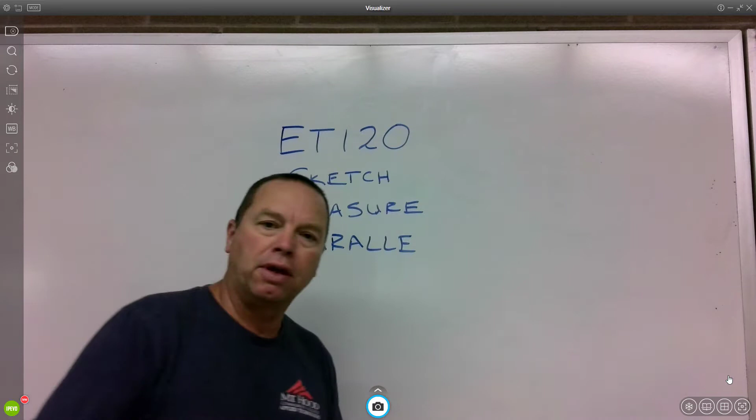This is going to be a video for Wednesday, would be September 30th, maybe? Today's 28th, 29, 30, yeah, September 30th. So we're going to continue on. You did a lettering exercise last time, and this time you're going to do some sketching.

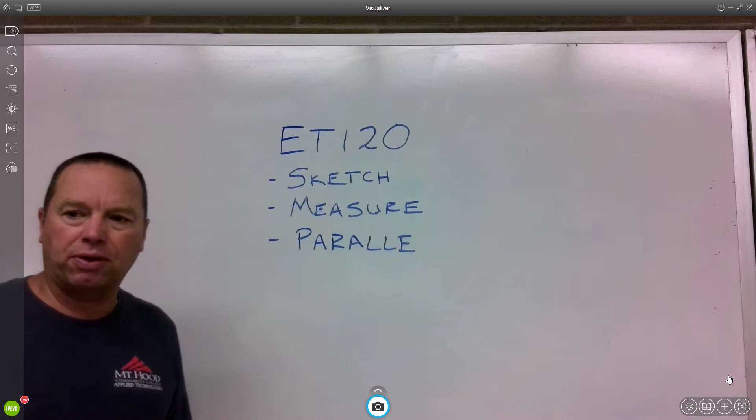So I want to talk about actual sketching and technique. I want to talk about the book a little because I guess we have a little problem with the book and the bookstore. But that's all right. We can work our way through it. I want to talk about measuring and architect versus engineering scale a little bit because you have to do some measuring on this exercise. And then we're going to focus on parallelism, so keeping things parallel.

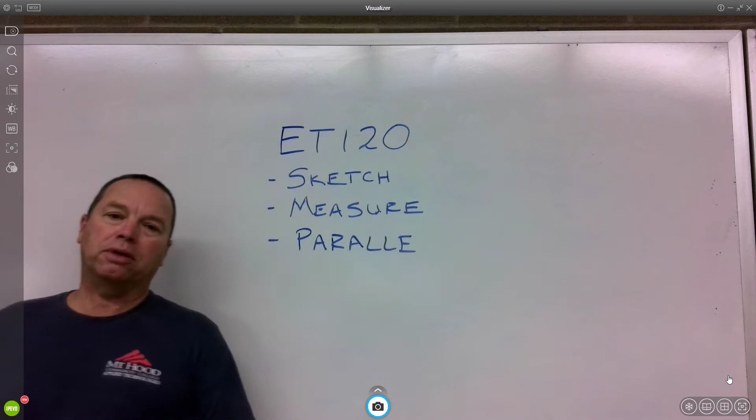All right. So sketching is super important. They actually talk about it in the first few pages of the book, and then they move away from it and really get into the instruments and the triangles and how to make angles and how to draw straight lines. And then it's not until chapter 5 that they come back to sketching. But of course, that's not the flow I want. I want us to sketch first, and then we'll move to instruments. So I'm going to jump around the book a little bit. The assignments will jump around the book.

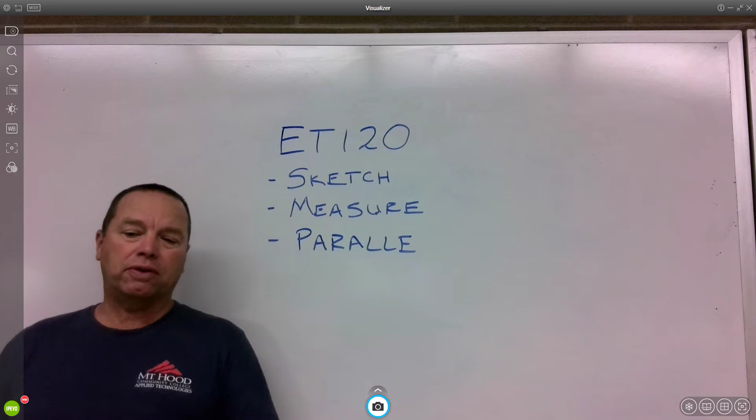I have edition 7. If you have edition 8, I think the content will be pretty much exactly the same, and maybe even the assignments will be the same number. They're definitely in your book, so I'm going to show you where they're at in edition 7, and I bet in edition 8 you can find them no problem. So, all right, I'm going to swing the camera around, and we'll look at the book a little, and then we'll talk about sketching and your first pencil and paper exercise. Okay, so here we go. Let me get it adjusted up good, or at least better.

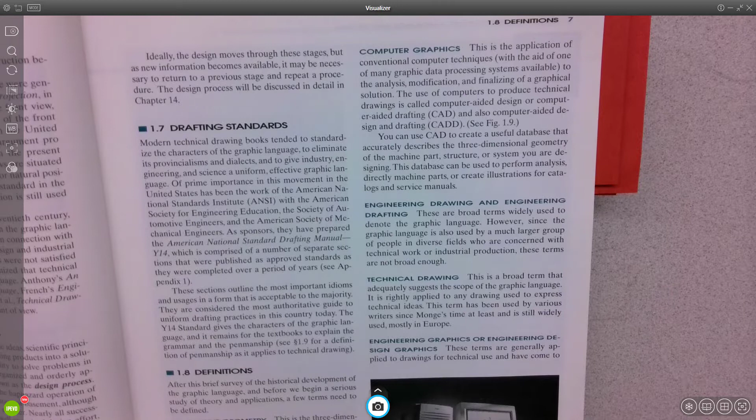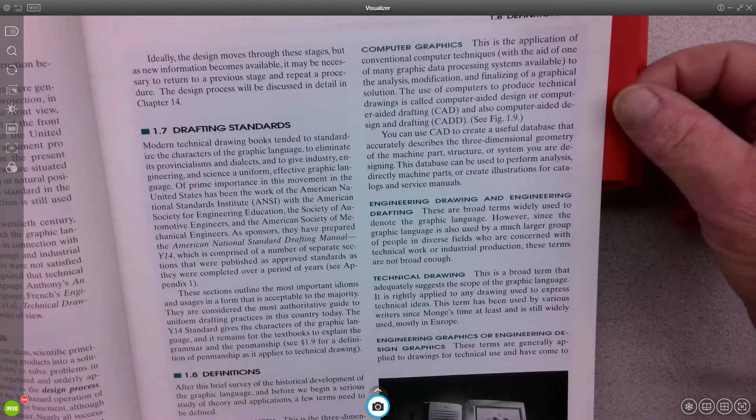All right, so early on page 7, it starts to talk about drafting standards, and drafting standards are why this class exists. You can make a drawing, but the important thing about the drawing that you're going to make is somebody else in this class or somebody else across town or me, I need to understand what you're making. So we need to have some kind of standard. And the book talks about these standards early in chapter 1. So you might look through there. There's a little bit of historical information about that. And then it kind of talks about drafting in general and the flow of drafting and the different styles.

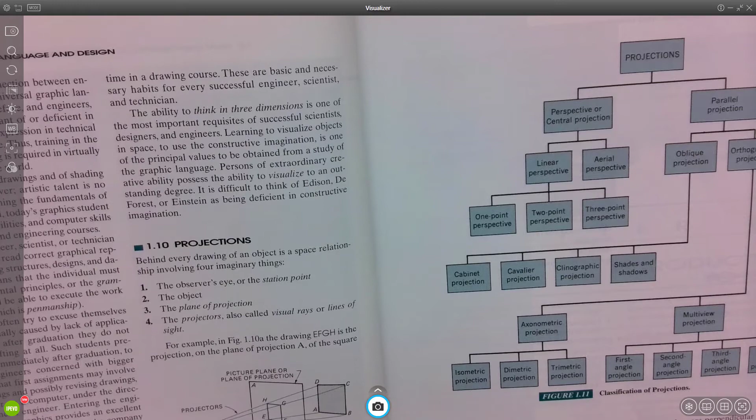So most of this over here has to do with more of a pictorial type of drafting or more of a three-dimensional type of drafting, okay? Down here is where we're actually going to focus, which is called multi-view projection. Now, a projection is just a view of an object. It's where we look at an object and we project it onto a piece of paper.

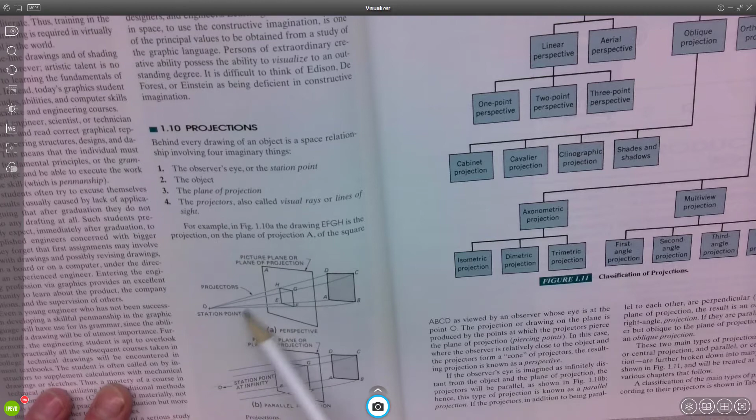What we're going to do in our projections is we're going to do straight line, very perfect parallel projections, right? These are perspectives where this is the true size and it gets smaller and it looks good. We're going to go true size to true size. We may scale it up and down, but our goal is to get true size and true shape on the paper, okay?

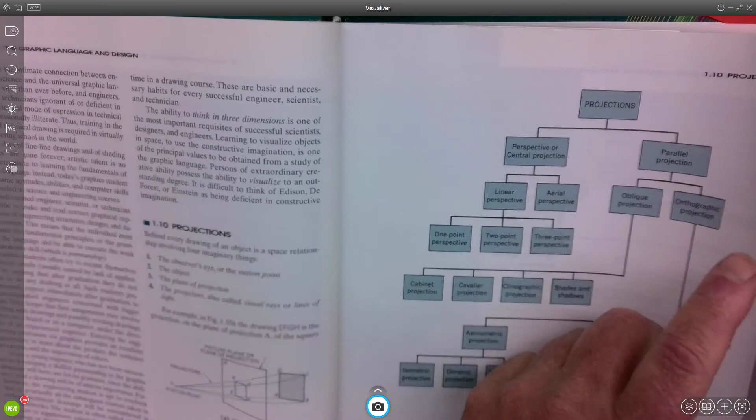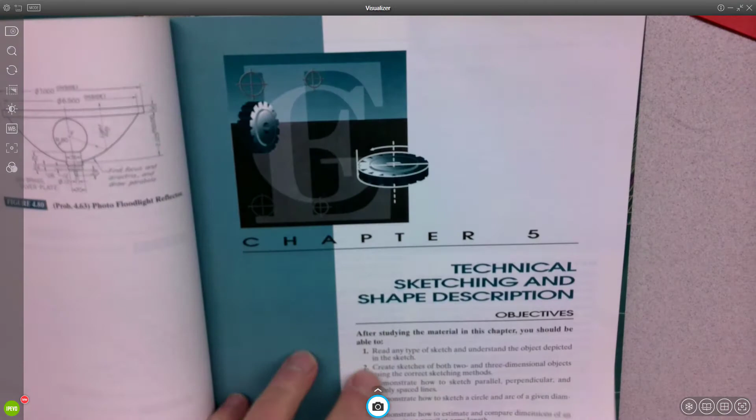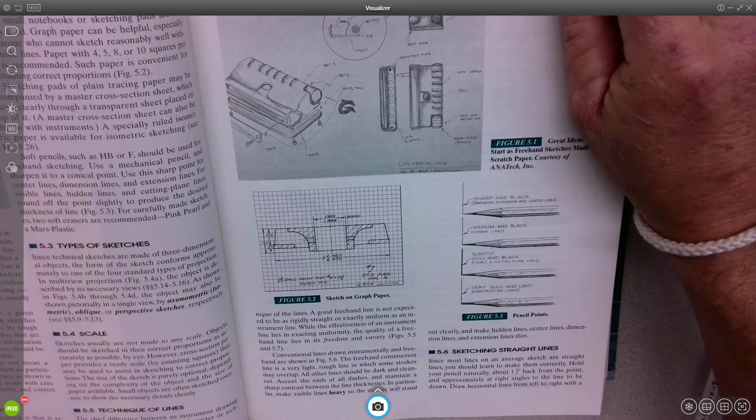All right, like I said, we're going to jump around a little bit. I'm going to start with technical sketching, which is chapter 5. So as I go through stuff today, if you want to reinforce that, you can do that by reviewing chapter 5 information. And there is a bunch of information in here that I am not going to cover. But at some point, I'll probably come back to it. Like, we will talk about scale quite a bit, and we'll actually talk about pencils and how to find different leads and different hardnesses. But the sketching we're going to focus on is this kind of technical sketching, okay?

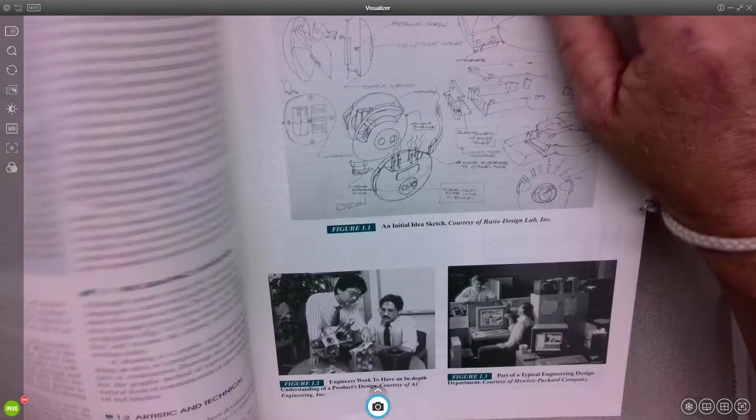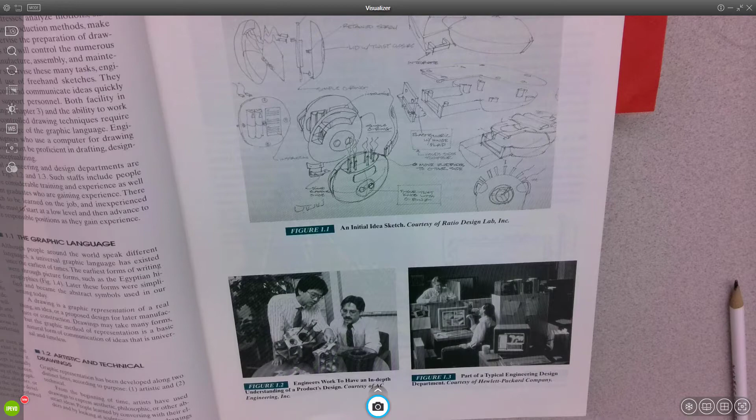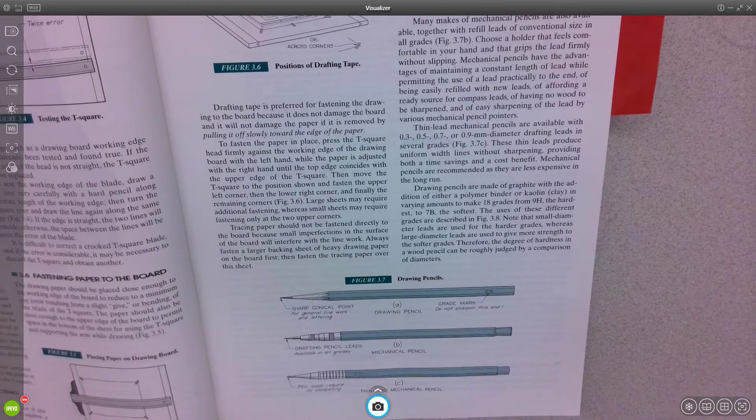It's done a lot. Right in the very beginning of the book, they start to talk about idea sketching, right? And it's like, oh, they should start there. That's exactly where most projects start, is in the sketch phase. But then they don't, right? They head right off into CAD, like, oh, that's not even where we need to go. And then they head off into instrument drawing, which I don't want to do first, okay? We're going to sketch. So chapter 5.

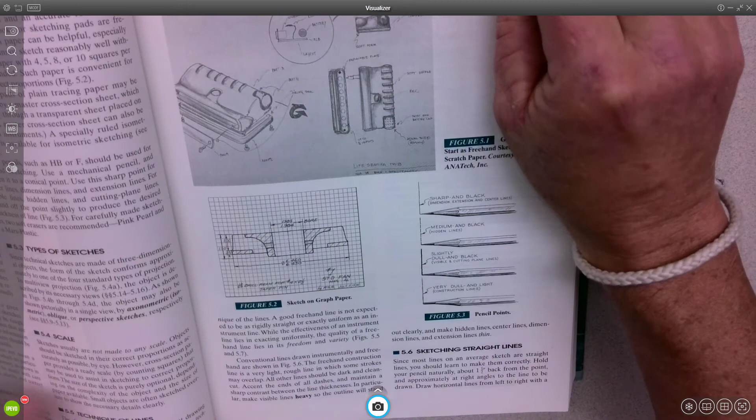All right, so let's just talk about the basics of sketching, because I'm no artist. I don't expect you to be an artist. But if you do follow some basic guidelines in sketching, you can make some decent sketches, okay?

One of the most important features for the sketches that we're going to make is parallelism, which means these lines appear to be parallel. That's why this looks so good. These lines down here are parallel, top and bottom, and then they're 90 degrees to each other if they're supposed to be 90 degrees, right?

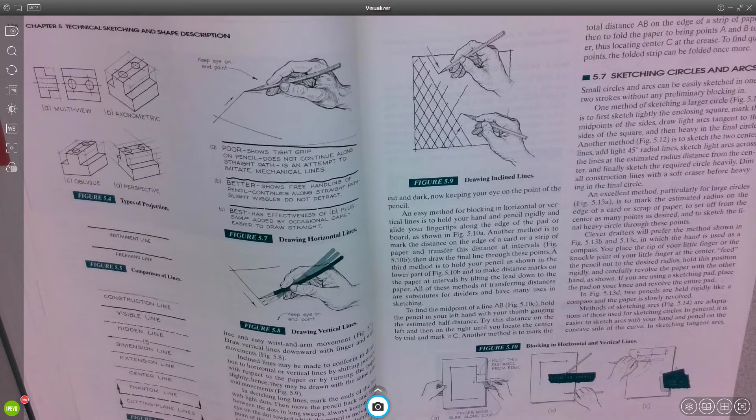So when we get into more advanced sketches, like three-dimensional sketching, this looks good because all of these lines are parallel, right? So we're going to really focus on this concept of parallelism in the beginning. Our first exercise is basically doing lines like this. We're going to do different setups, and it's a little complicated, so I'm going to go through it a little bit with you. But I want to talk about basic sketching first.

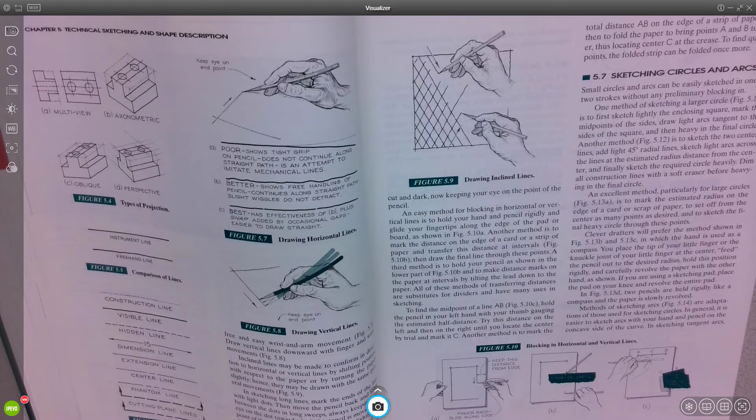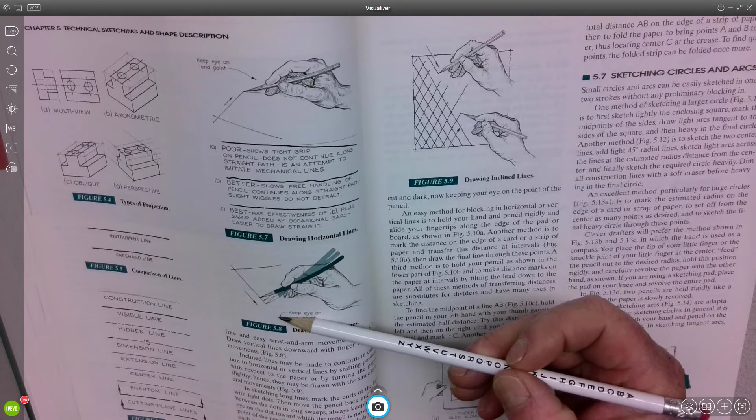How to get straight lines. You can see this motion here, and keep an eye on the end point. That's really important, which means you have to have a start point and an end point. And he's making small strokes. Small strokes will give you lines that look like this, and that's okay in a sketch.

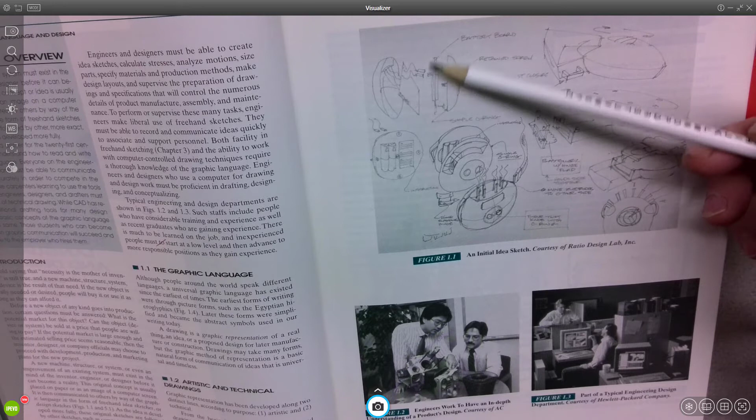Again, back to this first concept sketch, right? There's no perfect straight lines there. And where they did actually just draw a line without making small strokes, it looks kind of goofy. Okay, so if you can kind of just work through the line in smaller strokes, it makes a lot of difference.

I'm going to try to demonstrate this for you. So I'm going to use my engineering green paper. I'm actually going to tear it off the pad and just set it down and then sketch some lines. Use this green paper, I highly recommend it. First of all, I can see the lines coming through.

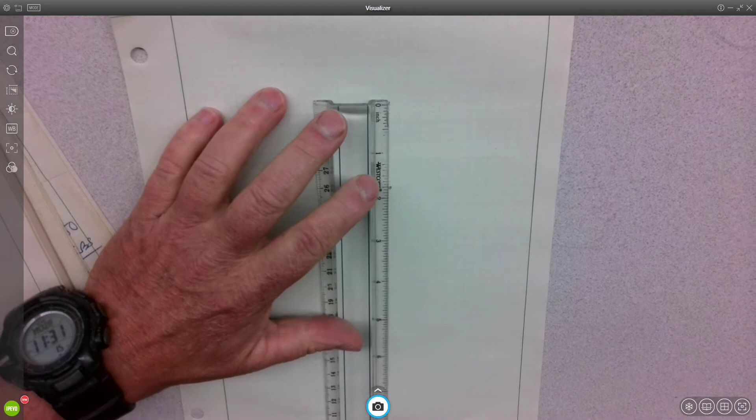So if I need a line this long, and I know its length, it's okay to take your scale, right, and lay it down and give yourself two marks. I'll go here, 2 inches, right? I'll get rid of this one. Good eraser is super important. All right, so it's okay to lay the scale down and boom, boom, put some marks down. That's fine. This is a 2-inch line.

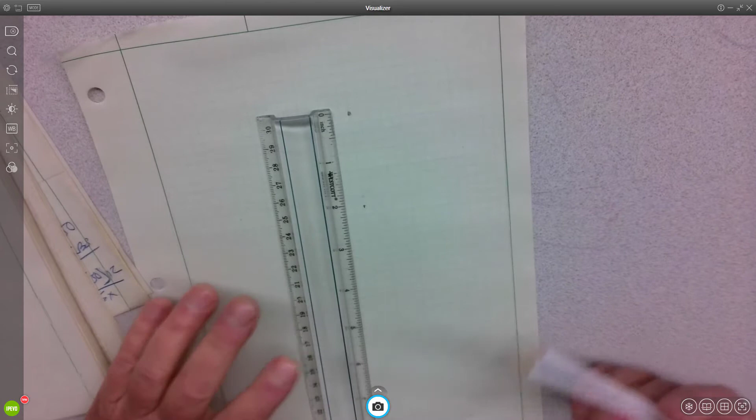But when you go to draw it, get rid of the straight edge, and then let's put a sketch in. And what I do is I kind of give myself a start and an end spot, and then I work it. Small strokes from one spot to the other.

All right, 1 minute. Okay, sorry about that. I had to do full surgery on my pencil.

All right, so since I did surgery on the pencil, this is the pencil I like. This is a 0.5. I actually prefer a 0.7. And the reason I like it is because it has the spin eraser. It gives you lots of erasing potential for drawing.

All right, so we talked about sketches. So, vertical, horizontal, not so bad. And don't hesitate to do whatever you need to do, right, to make yourself a good line. You can rotate your paper, that works fine. And parallelism is what we're looking for, right? And then we are looking for some line quality. We want these lines to be the same, thickness-wise, okay?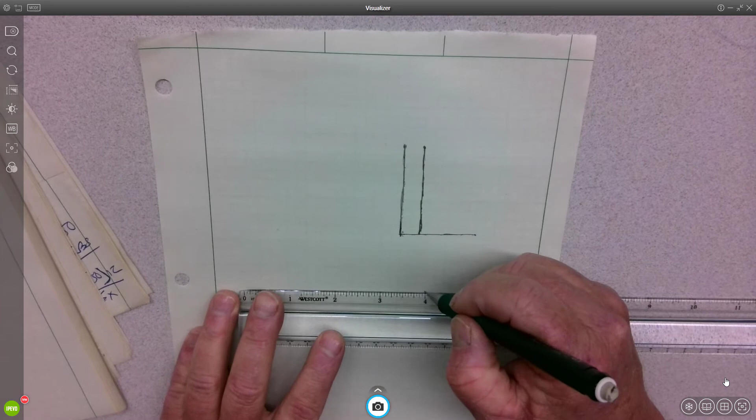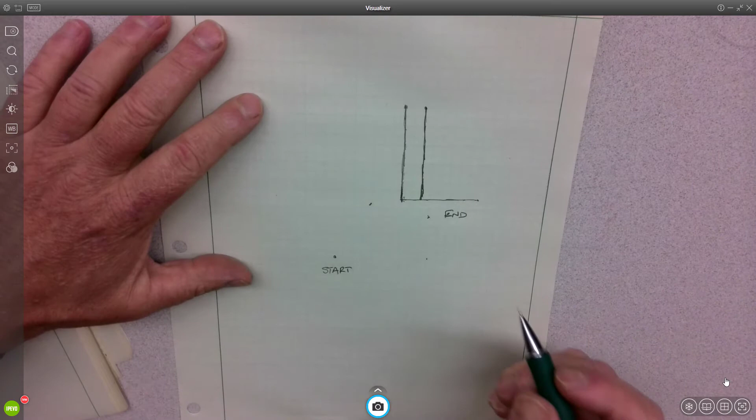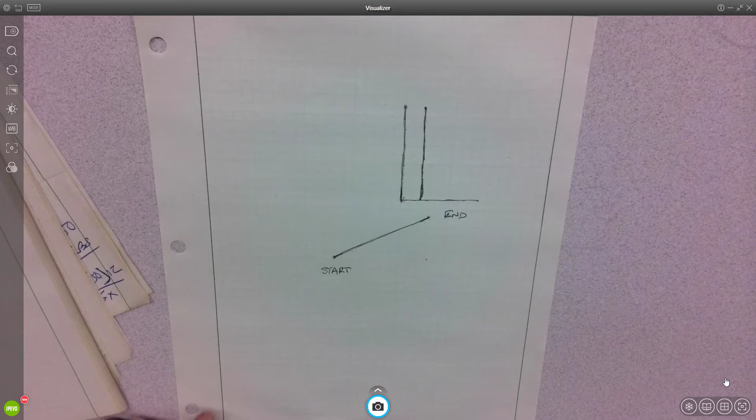This is where they're talking about keep your eye on where you're going. So I'm going to go from here to here. And what I do is I put starting lines at each end, right? But then when I'm going from here to here, I'm looking at this point as I'm trying to get there. That will make a very straight line for sketching. Start point, end point, look at the point you're heading towards.

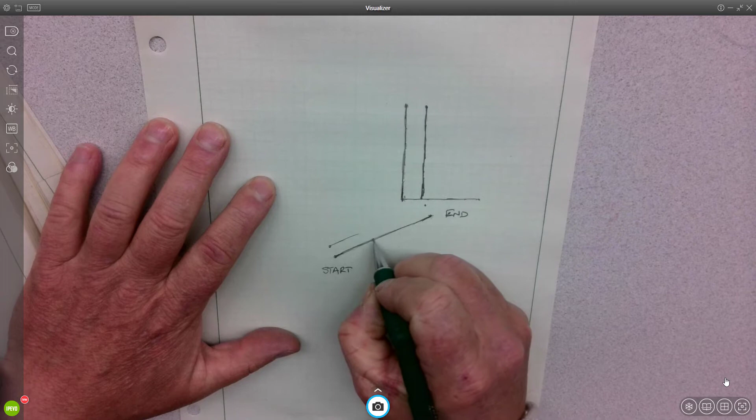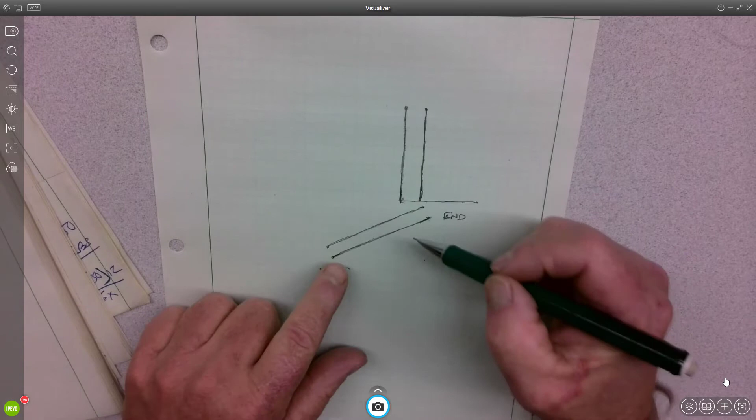Basic technique. Then if I was to put another line here and here that's parallel, when I sketch, I focus on this line and my separation between those. So I can get parallel lines, but I have to think about, as I'm drawing this line, I have to look at this and stay the same distance away. It is a little bit tricky.

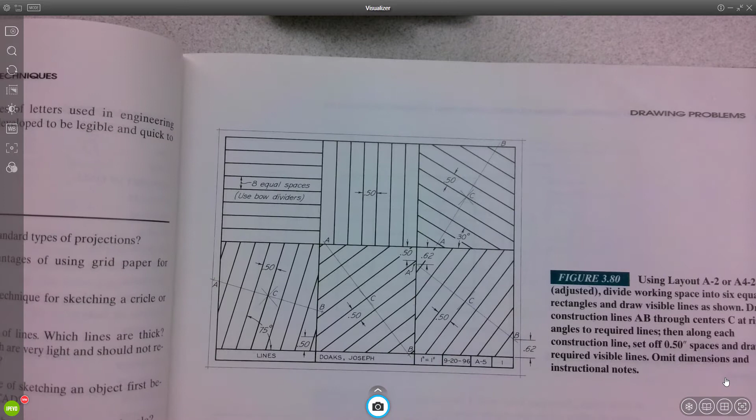All right, the exercise that you're going to do in edition 7 is on page 87. So it's this exercise here. And you're going to sketch it. And you know and I know that that's not a sketch, right? These are CAD lines, printer lines, computer lines for sure. But you're going to sketch it, okay? And in the exercise that I put up on Blackboard, let's just see if we can find that real quick.

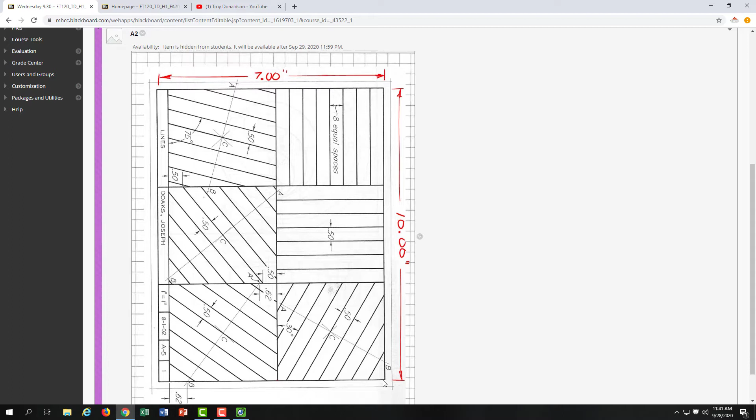Okay? Now they talk about using A-2 or A4-2 adjusted and then divided into 6 equal working spaces. So that's what you're going to do. The A-2 and the A4-2, that's referring to the front cover, and it's referring to title blocks. So really, that's referring to this title block here, which I do want you to include. I want you to put the word lines here, and I want you to put your name in there.

And notice how straight and clean these are. That's because they used guidelines. So give yourself guidelines for the text. This is a scale, 1 to 1. This is the date, kind of close. We're more like 9/28 and not really 96. This would be the file location. We can leave that blank. And this would be the page numbers.

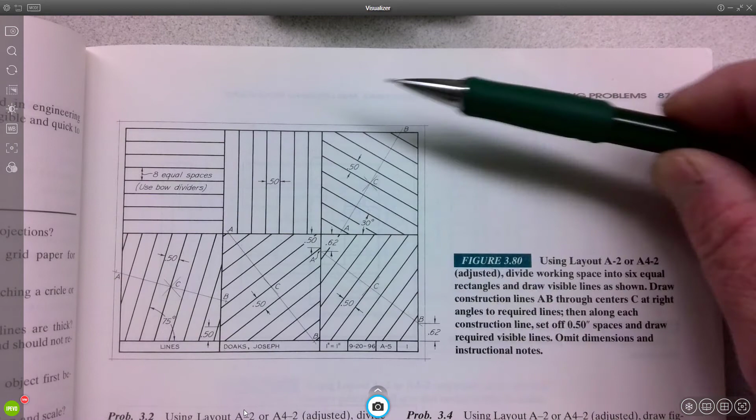We have 1 page. All right, so let's talk about these 6 areas because it can be a little tricky to lay them out. You're just going to sketch the lines, not the text. So no text, no dimensions, just the lines. Okay? First one's pretty easy. It says use bow dividers. You don't have bow dividers, but we just want 8 equal spaces.

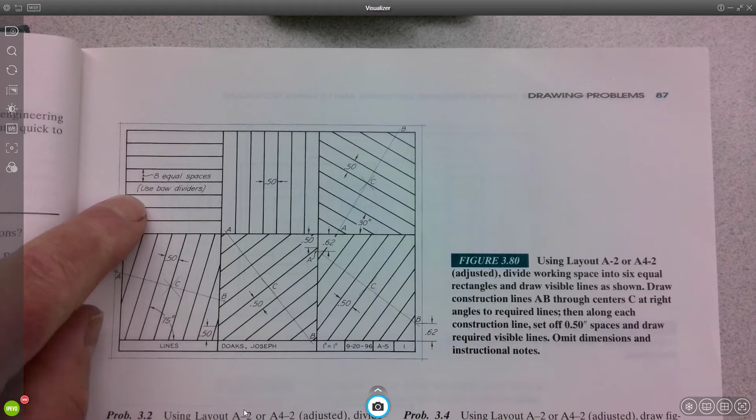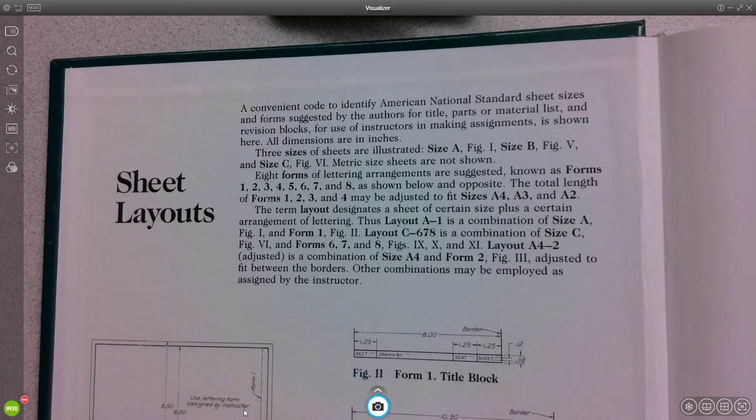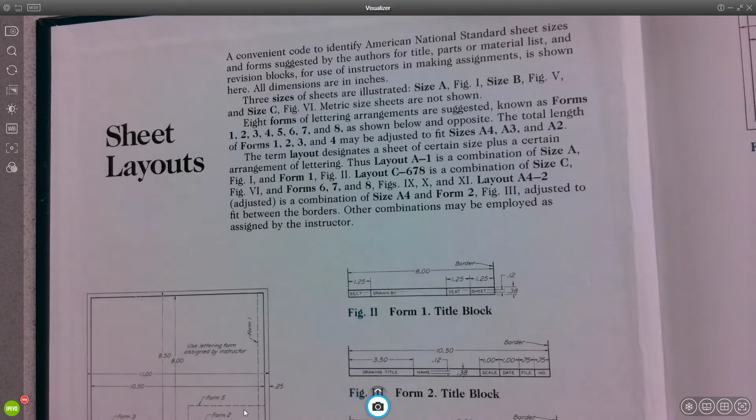So after you take your 10 by 7 and put down a space for the title block, and you can find that spacing back here in the Form 1 title block, maybe the Form 2 title block, this one. Looks like maybe it's 0.38 or 3/8 of an inch. Sorry, 0.38. Right? And this looks like all the information. So it looks like a Form 2. A-size paper, that's 8.5 by 11, and Form 2 title block. So that's the A2. Anyway, you can get that spacing.

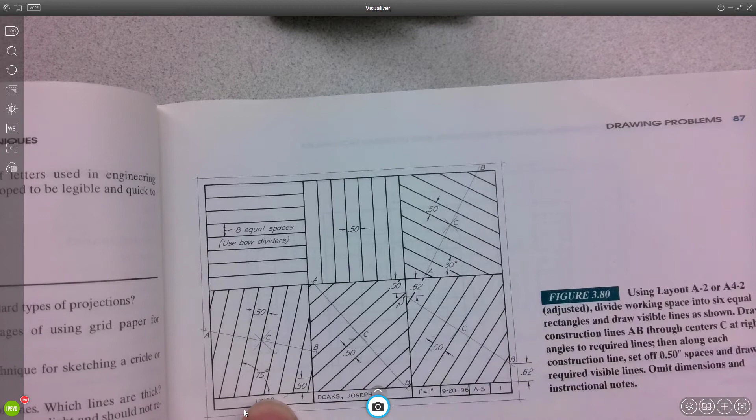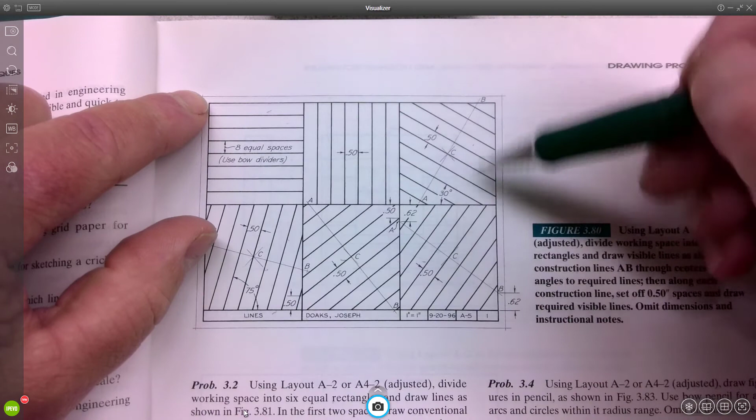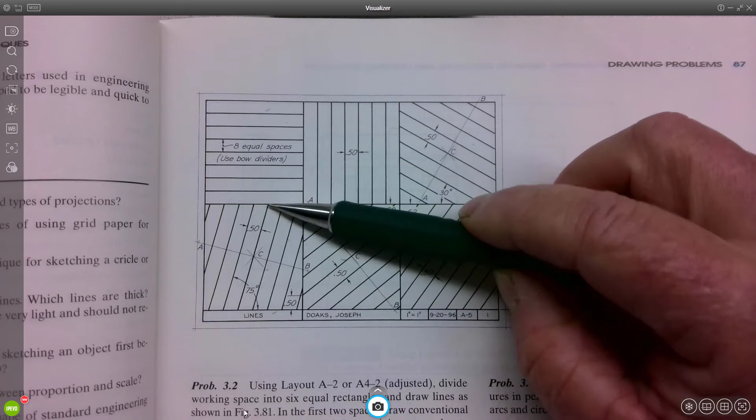Once you do that, then you break it into 6 equal spaces. So take this distance, which is no longer 7, right? It's 7 minus 3/8 of an inch. And divide by 2, and you got it. Right? And then take this distance, which is 10, and divide by 3, and you have these box sizes. All right. Once you do that, 8 equal spaces. So take this distance, measure it, use your calculator, divide by 8, and then lay them out, and sketch by hand all those lines. Yeah, for real.

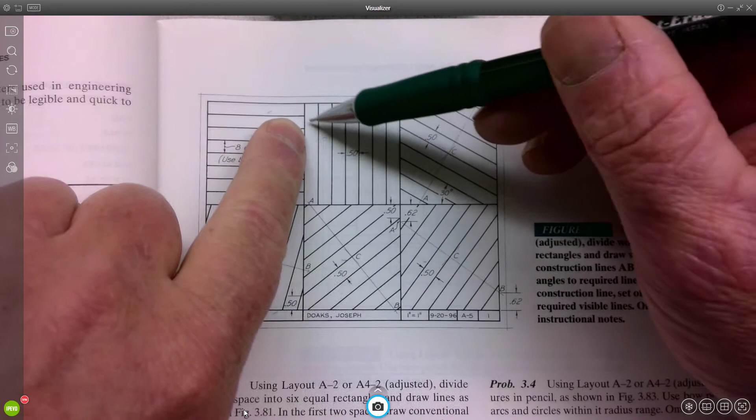All right, this one looks like they just want them 1/2 inch apart. So what I would do is I would start in the middle with a 1/2 inch, because you're probably not going to end up with a whole 1/2 inch on these outsides. So start in the middle with a 1/2, and then go 1/2, 1/2, 1/2, 1/2, and then whatever you end up with out here. So do those 1/2 inch spaces as long as you can, okay?

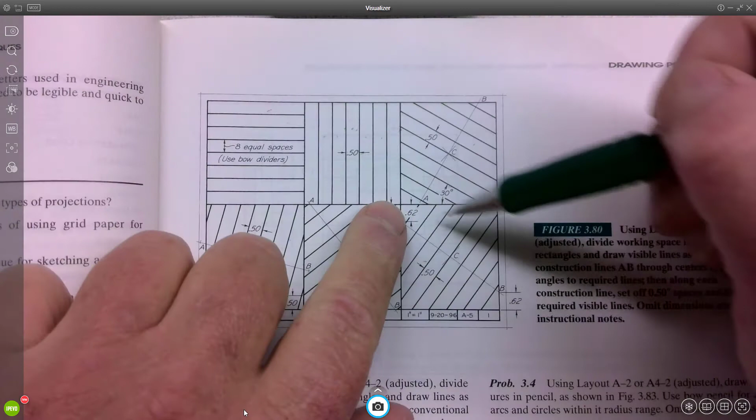All right, then this one, it looks like we're going to go 30 degrees. So if you have your 30-60 triangle, right, you can lay your triangle down and put a mark here and here. They want you to start at the center, the geometric center of this box. And you can get that by crossing the corners. That gives you this little cross here. Boom, geometric center.

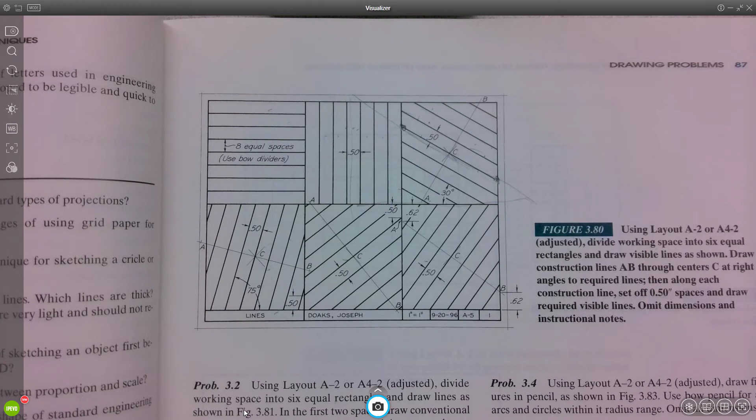Then the first line, I would use your triangle to give yourself a spot here and here, right? And that triangle is going to sit in here, kind of on this straight line, right? And then sketch this first one, and then measure a 1/2 and a 1/2 and sketch it. 1/2, 1/2, sketch it, and just continue. All right, so that's the whole top. The bottom's even a little trickier, okay?

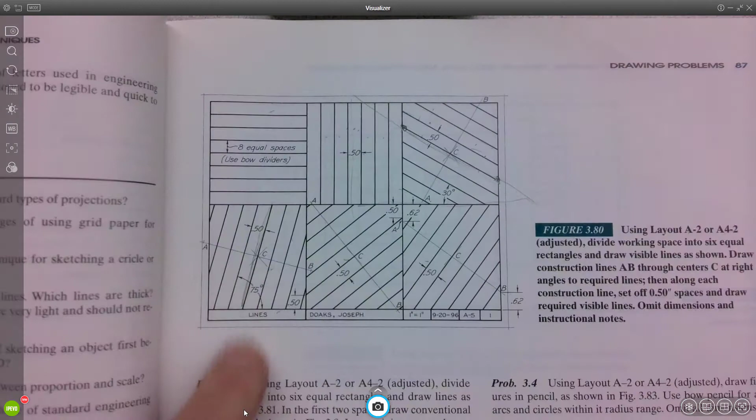So the bottom here, again, starting at the geometric center, this time they want you to go at 75 degrees. So first line here, and again, how do we get to 75? Well, they actually show you in this instrument area. Let's see if I can find it. How to put triangles together. I should have tabbed that page. I think I'm getting there. How to put triangles together to get any angle.

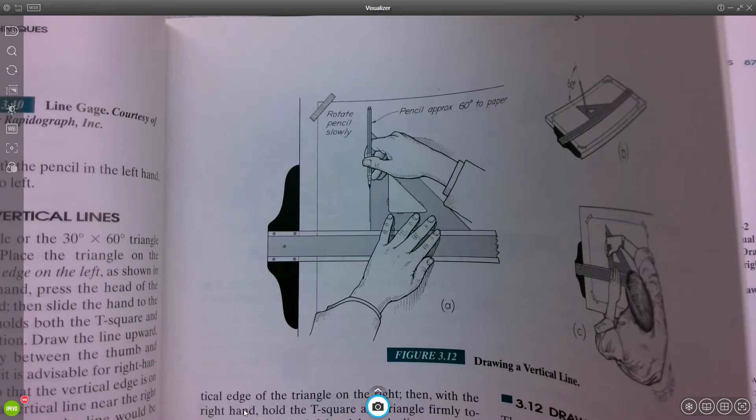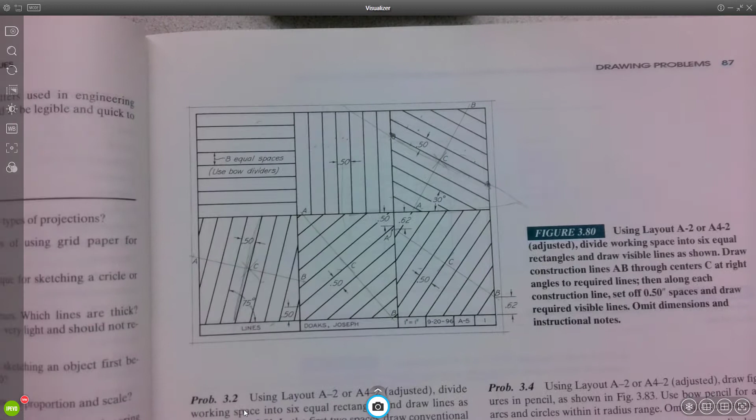But again, from the center, 75, and then 1/2, 1/2, 1/2. And measure that, right? Like, use your scale and go, oh, that's a 1/2 inch. That's a 1/2 inch, and then boom, draw parallel, sketch parallel. Okay?

All right, now, this one's a little more complicated. You're going to measure down a 1/2 inch. You're going to measure up a 1/2 inch to create this first line, right, through the geometric center. So find the geometric center by crossing corners of the big square, and then measure up a 1/2, measure down a 1/2, and then you have your first line, and then we're 1/2 inch, 1/2, 1/2. Again, sketch, sketch, sketch.

This is going to take a while. This is going to take an hour plus, maybe 2 hours, to lay this out precisely with your scales, do some type measuring, right? And then do some sketching. Sketch nice and light in the beginning and then darken it later. Make sure you have it laid out correctly before you darken it up. It's very hard to erase darkened lines.

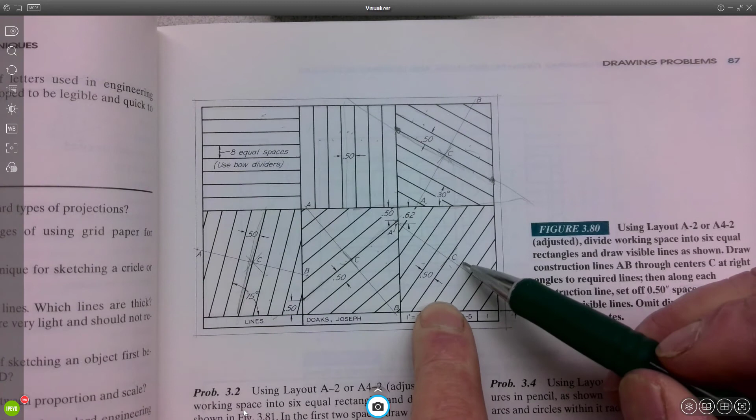All right, the last square, let's talk about that. Looks like we're going to start at the center. Looks like we're measuring up 0.62, so that's an engineer scale, 0.62, and down 0.62 to this perpendicular line. So this line you sketch in, and then we're going to go perpendicular to it, 1/2 inch of spacing. All right, so that one's even a little more tricky.

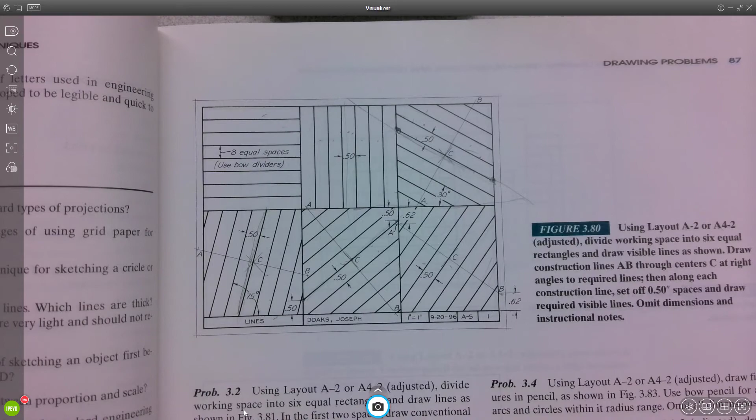All right, if you need help with any of this, because that's complicated, right? That's getting a little tricky. I can shoot more videos on this first lab if you need me to. Like maybe how to lay out box number 6, right? That last one, I can sketch. Let's make sure I'm on screen. I am. So let's say here's the box that you're going to start with. This would be the lower right box, this complicated one.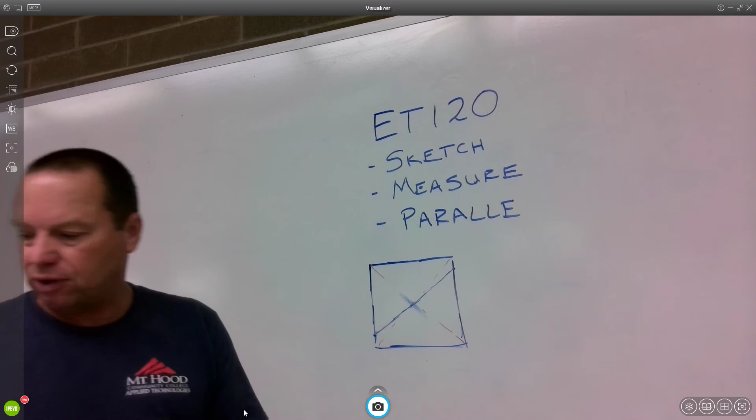Yeah. So then I would have to take a triangle, and now I'm going to go perpendicular to that. It would be great if I had another color, like black. I don't see a black. All right. Oh, maybe a green. If this works, I'll use a green.

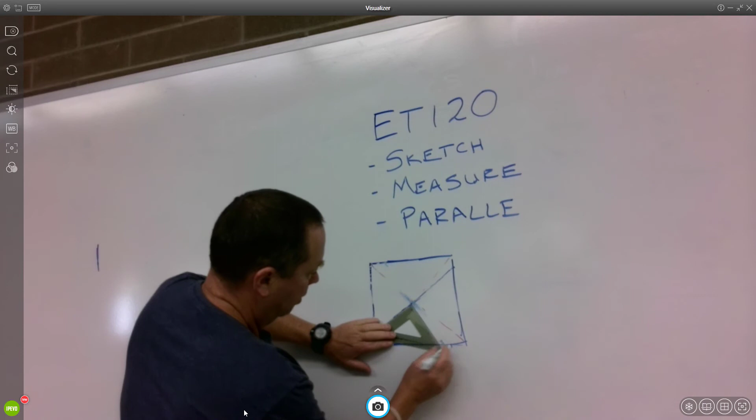All right. So now I'm going to start drawing, right? It looks like I maybe did this mirror image, but I think you get the point. So now I would use my triangle to set up perpendicular to that. Now, my rectangle might not be the same proportion as yours, so yours could end up slightly different. I get that. But give myself a starting point, the center, and maybe the other side here. And then that's going to be the lines that you set up. That's really hard to get off there.

All right, this is going to be trickier. So there's the first line, right? Then I would measure half and half. You know, you can give yourself a few of those if you want. Half. And then I'm going to work with parallelism. And I'm just going to continue. I would measure this, half, half, right? But right now, I'm just going to focus on sketching some parallel lines.

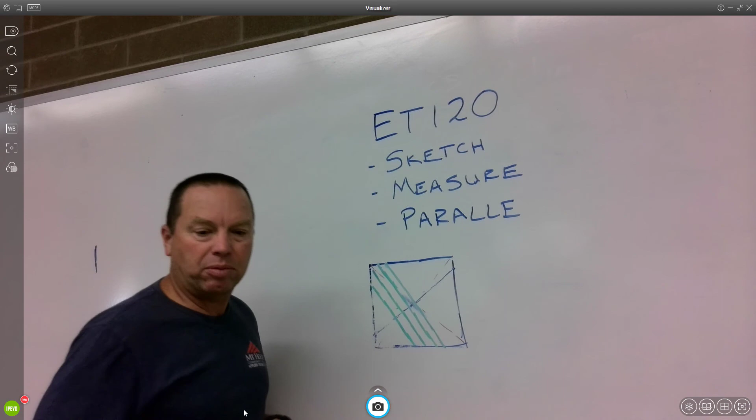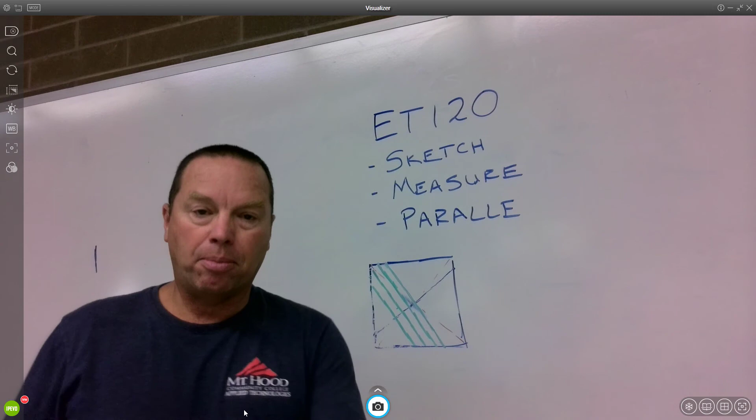All right, looking at the book, it looks like I flipped this. Like this construction line is down here, and flip it over. But that should help with the lower right-hand box to get you started. Kind of just walking you through it. The rest are tricky too, but not as tricky as that one.

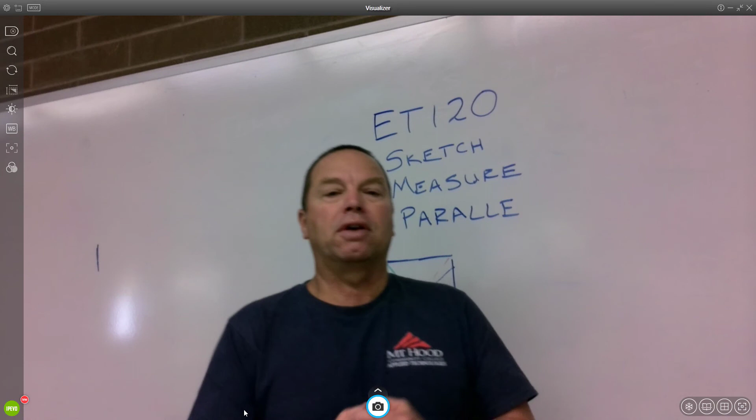So, all right, good luck. Let me know how it goes. I'm interested in how long this takes you, so maybe time yourself. I think I made it worth 30 points, so it's worth quite a bit of points based on the other assignments that we will have.